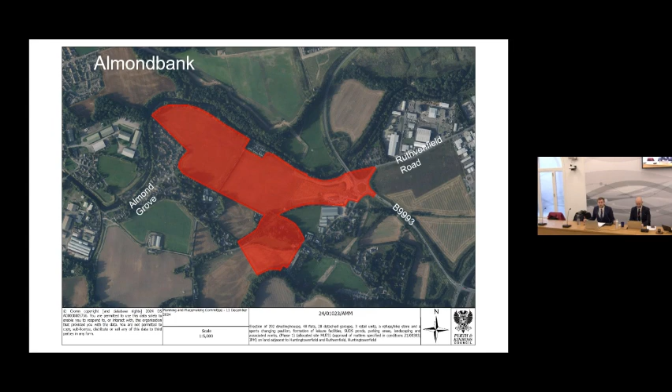This is now an extract of the Perth and Kinross Local Development Plan 2, adopted in 2019, showing the site under question. As seen, the site is allocated as part of the wider MU73 designation. Next slide, please.

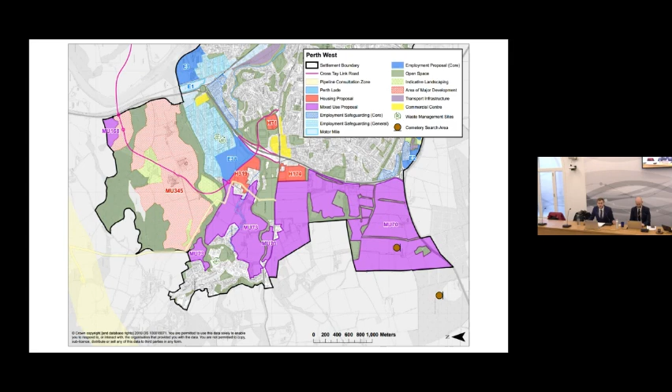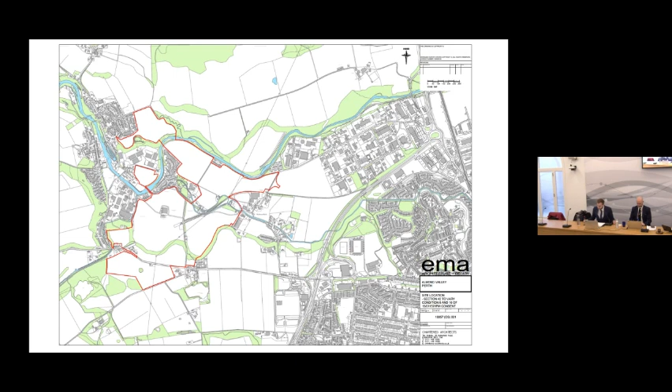This plan now shows the extent of the planning permission in principle for a mixed-use development that was granted. The application before you today constitutes only the northeasterly section of this site. Next slide, please.

This plan shows the detailing that has already been approved for this section of the site for the former Stuart Milne Group. Your attention is drawn towards the general layout and arrangement of the scheme. Next slide, please.

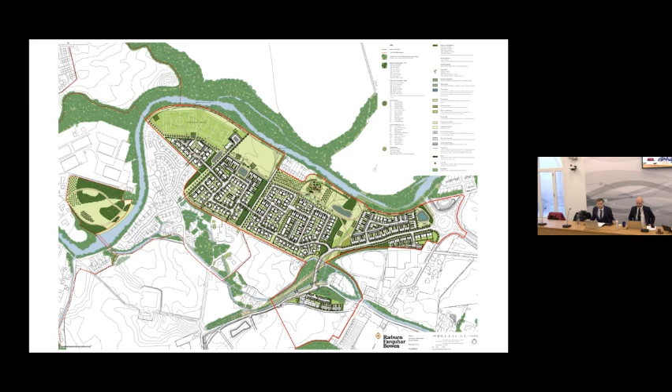This plan now shows the detailing that is currently proposed as part of this application. As can be seen, the general layout and arrangement is broadly similar to that already approved. The main changes primarily relate to the design of the buildings to reflect Barratt Homes house types and styles. The section of the plan highlighted by the yellow arrow will be shown in greater detail on the next plan. Next slide, please.

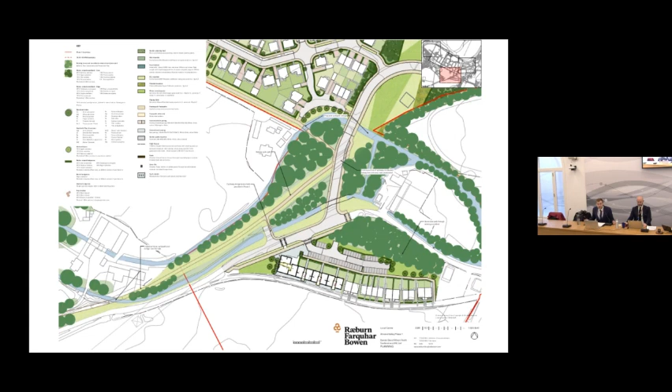And here is that section in greater detail, showing where some of the retail units will be placed to form a commercial centre, in addition to a new crossing over the Townslade to allow an additional access into the site. Next slide, please.

We now have a typical elevation drawing showing the 4-bedroom Ballater house type. Of the 340 residential units proposed, 255 will be for private sale and 85 will be affordable homes. Paragraph 5 of the reports before you detail the breakdown of these homes, showing there is a combination of 1, 2, 3 and 4-bedroomed homes.

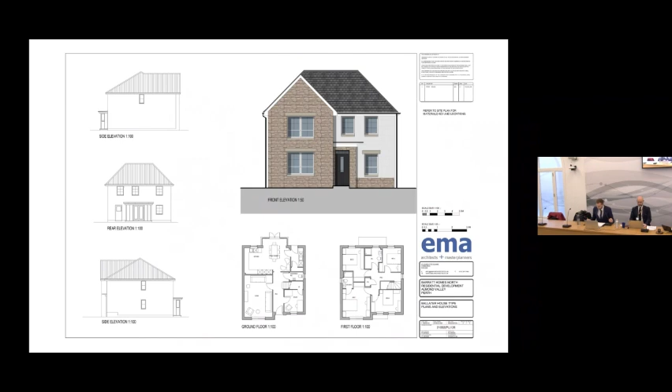Next slide, please. Thank you, convener. That now concludes my presentation. I will leave members with the proposed site plan for reference.

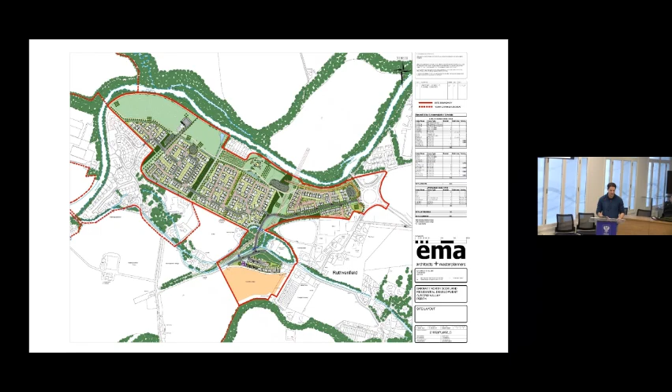Is that on? Yeah. Thank you, convener. Thank you, committee. It's great to be here. Thank you for giving me the opportunity. First off, I'd just like to say I recognise the need for housing. People need homes, and I'm not against that. However, I do have some specific objections to the development in question. However, I wish to be constructive and proactive in my criticism, and I hope that comes across in what I say. I'm amalgamating a number of my written points which I submitted, and I'm paraphrasing some stuff too due to time constraints.

I think there's potentially an opportunity being missed here. There's some fantastic examples of sustainable, community-centric, well-serviced developments being built across the UK that are winning awards for their forward thinking. This committee has the opportunity to set expectations for similar with this development. I think it would be a missed opportunity to approve another car-centric urban sprawl development, especially in light of PKC declaring a climate emergency and other factors like that.

In addition, there are multiple visions for playing fields and other sports-centric community spaces. However, what about for people who aren't involved in sports, who aren't interested in sports? It'd be great to have other spaces available for people from the community to come together. This could be allotments, community gardens, an orchard, social workshop spaces for people to learn and share skills together, a community hall. These things do appear to be missing, and these are things that would really be great to see, where people from a diverse group of backgrounds and abilities and ages can actually come together and develop as a community. I'd really like to see something along these lines, but I also like sport, don't get me wrong.

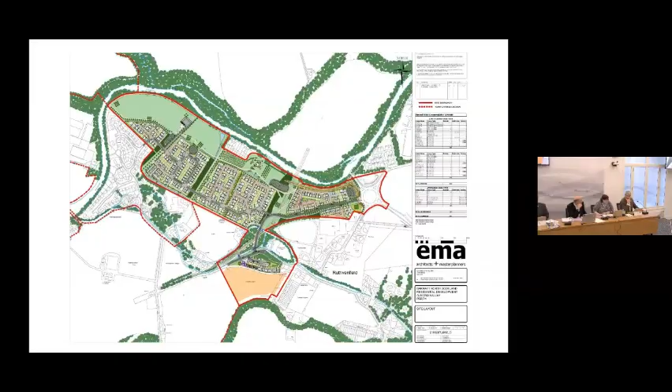Yeah, sorry for the people who've dealt with this before already. Is it possible to get the map up again? I can't see what I'm describing. No criticism of you - I just, there we go.

So basically, the 22 properties of Grey Row are serviced by a communally owned septic tank, which is under the existing football pitch. However, in the field immediately to the east of the football pitch, between Grey Row and Tarry Row, there is a runoff from the septic tank which joins Tarry Row's runoff and then disappears into Perth somewhere. That runoff runs through the field, and there are 3 access hatches to access the pipe running through that field from the football pitch towards Tarry Row. They're submerged about half a foot under the ground, and the pipe is about 4 to 5 feet below that, accessed by these 3 hatches.

If there is an issue or blockage, we have to hire a mini digger, dig up these hatches, excavate, open them, and undertake rodding and repair activities. So if something did go on this field, it would put us in a very difficult position - we need to access this, otherwise sewage comes back into our houses. So that's the point - it's not the septic tank itself, it's the runoff and drainage system attached to it, and foul water too. Okay, apologies, thank you very much for that.

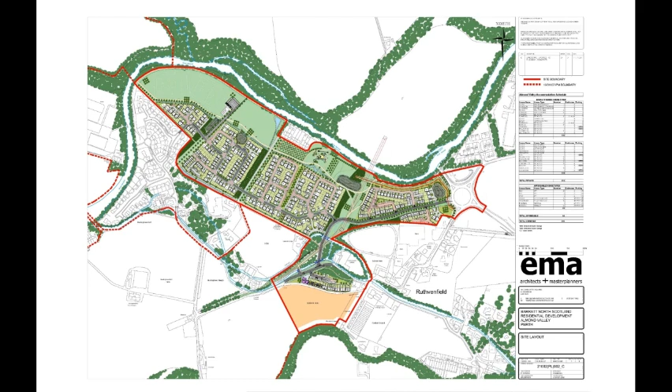Where the cursor was, the football pitch down in the centre, is that the football pitch? Yes, so you've got Grey Row, then immediately behind us are our gardens, and then there is an existing football pitch, and then there is the field beyond that. So yes, there is already a football pitch there, and they're looking to provide more football pitches and playing fields in addition within the proposed designs. But that second field is where our access hatches are. We don't have any access hatches under the existing football pitch, so they remain undisturbed if we do have issues. But that's actually outside the proposed development. Is it? Okay, well the red line is- I wasn't sure. I know there was stuff planned for future phases, so that's what I may have become confused as to what phase that was, but there are things proposed for that down the line.

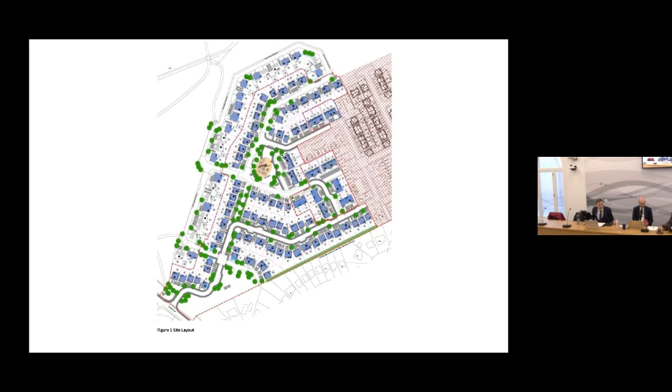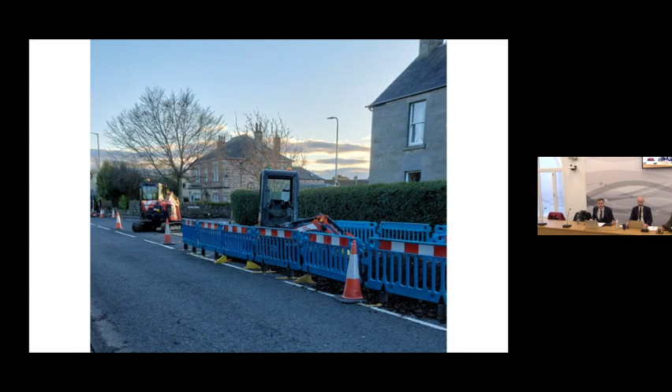Thank you, convener. That now concludes my presentation. I will leave members with the location plan for reference.

Thank you, Mr. Panton. Can I ask members if they have any questions for officers?

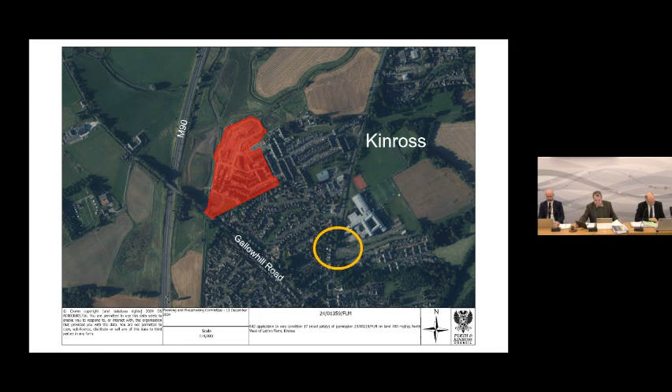Councillor Cuthbert: It's really a point of clarification, but in terms of if we refuse this application, does that mean they have to do the works immediately, or does it change something else?

So as they're already above the threshold of the original condition, if the application was refused today, then it would constitute a breach of condition. So our enforcement team would then have to look at that and whether it would be reasonable or not to serve a breach of condition notice.

But maybe to answer your question more directly, no, they wouldn't have to do it straight away. In fact, they can't do it straight away because there are already programmed works in that location that they can't get access to the road at this time. What they're looking to do is defer it until they can get access, which would be after the works that are being undertaken. And I understand that that's in March.

Thank you. No further questions?

Yes, just to advise members as well, you'll have seen there was an update circulated with an additional 2 informatives and a typo. So if you're recommending approval, it would be in line with that update that was circulated.

Okay. Right, can I ask for a motion? I see Councillor Cuthbert's already in there again. Keen to get this over with, eh?

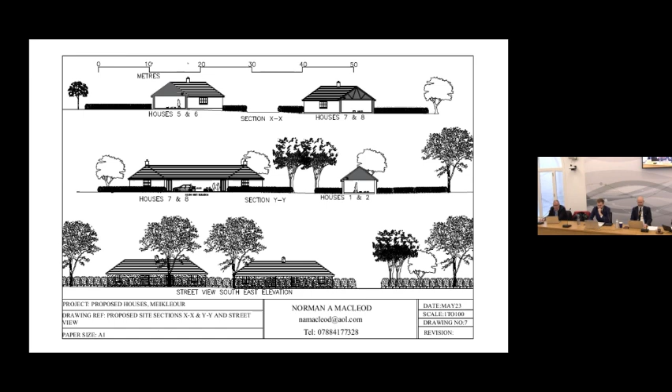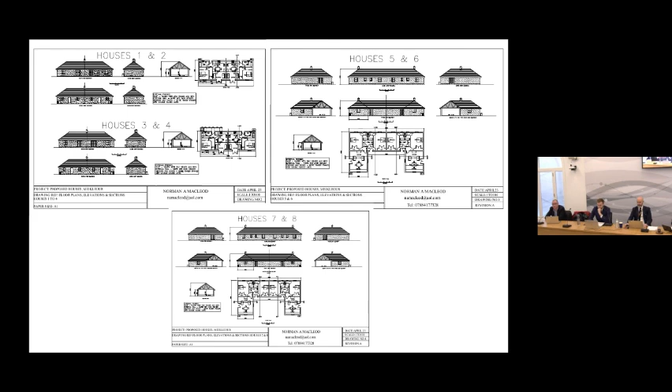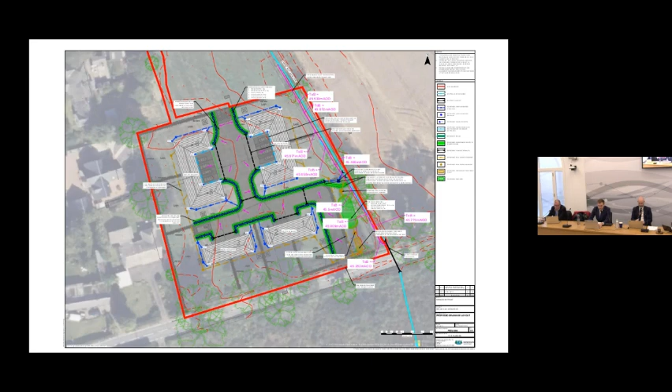Next slide, please. Thank you, convener. That now concludes my presentation, and I'll leave members with the site plan for reference.

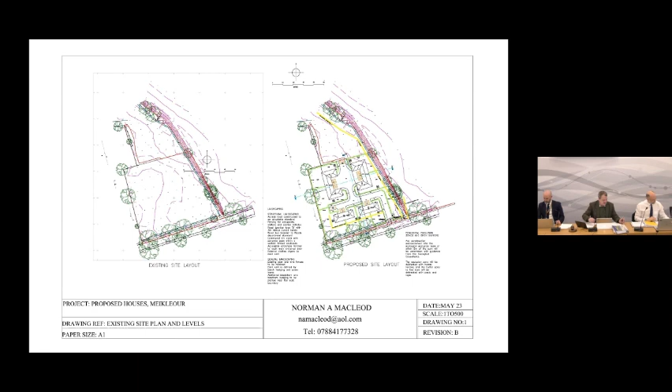Thank you, Mr. Williamson. Can I ask the members if they have any questions for officers?

Councillor Braun. Thanks, convener. I noticed that all the properties were going to have air source heat pumps on them. I know there's a condition about noise, but have you actually checked any assessment of the potential noise for these things? Bear in mind, there'll be, what, 4 of them?

Thank you for the query. Certainly from our experience, and relying upon the input of our environmental health colleagues, most of the air source heat pumps nowadays fit within the guidelines and the criteria that we set forward in the condition. So I'd be relatively confident that they would be able to adhere to that going forward.

Yeah, maybe just as an addendum, that is a point that we have debated at some length internally, and we've come to the conclusion that there's no longer a requirement, given our experience, to apply a condition in relation to that, unless there are perhaps new or different or excessive scale numbers of air source heat pumps, such that we would think that it would be beyond what the normal scenario is.

It's also worth noting that retrospective fitting of air source heat pumps and the such like is now encouraged through permitted development rights, and there is a standard applicable to that, and almost all manufactured air source heat pumps would comply, so it's unlikely that there would be an issue for this now fairly standard form of providing heating to properties.

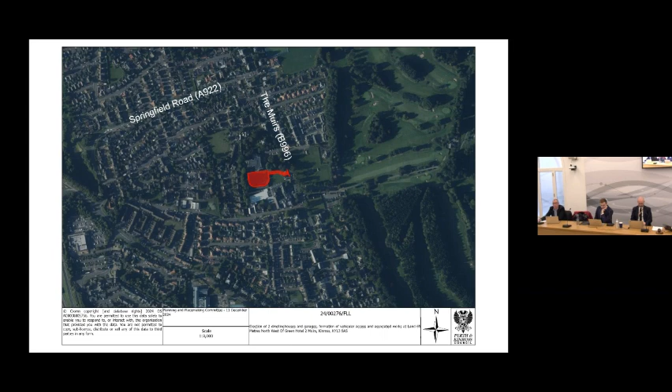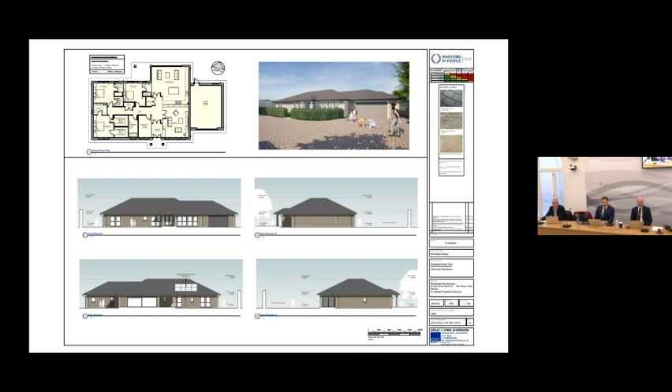Here we have the elevations of the intended dwellings on site. As members will note, they are hip roof style, comprising slate roofs, and also feature stonework, keeping the proposals relatively low scale.

Again, we have some more artist visuals from the agent showing how the development would fit in, and some further axonometric plans showing it from an elevated view.

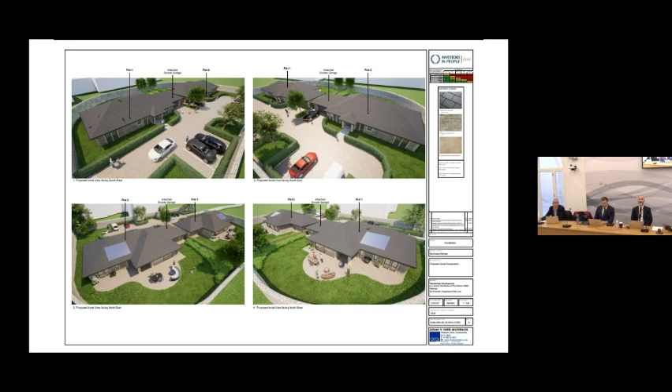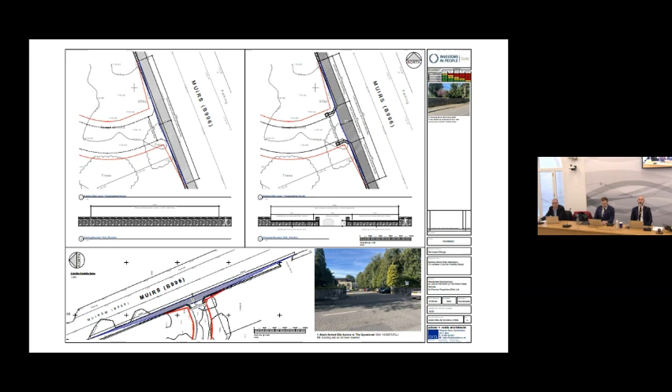This is the site access arrangements before us, showing both the provision of new gate piers leading into the site and the lowering of the existing boundary wall on either side to create the visibility splays. Here we also have the drainage layout that has been tabled.

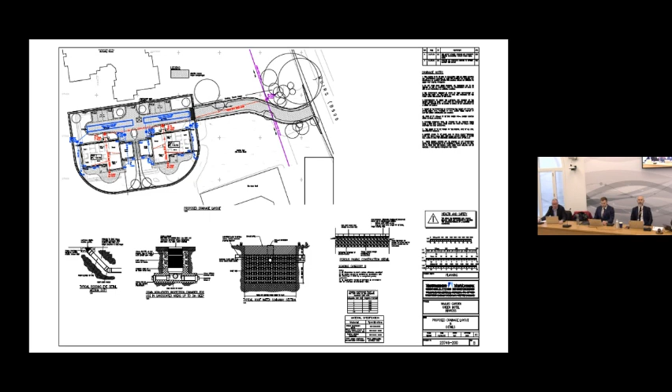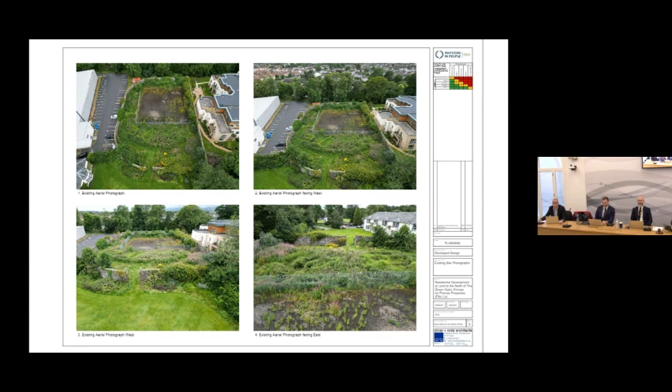I'll now run through a selection of site photos taken by the officer recently. We have some drone footage, again undertaken by the agent, showing the extent of the walled garden area sandwiched between the curling rink and the adjacent retirement home. As members will note, the tennis courts are quite overgrown, with an unkempt appearance.

Lastly, in reviewing the circulated reports, it was noted that condition 6 relating to the landscaping condition had omitted the requirement to replace landscaping which fails or dies within the first 5 years. So should members be minded to approve this application, we would be looking to update that condition to account for that scenario.

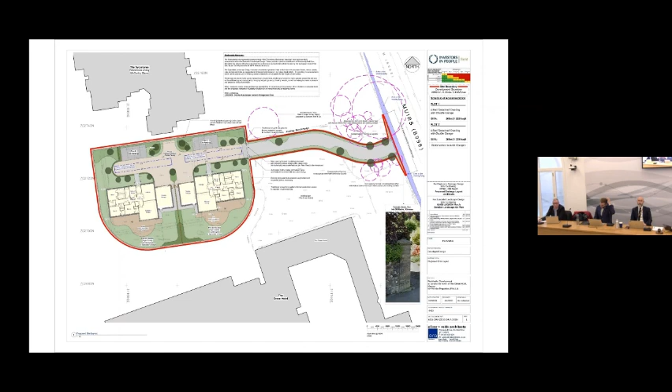Thank you, convener. That now concludes my presentation.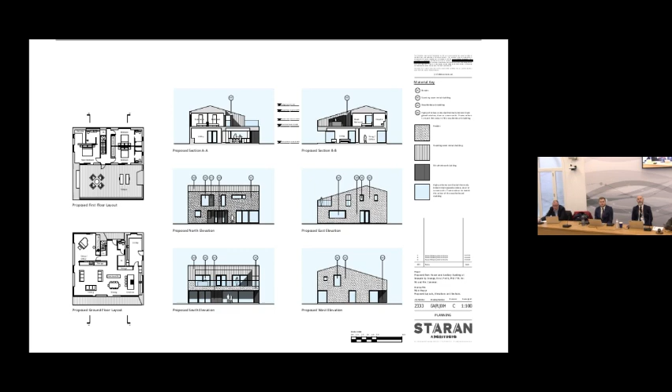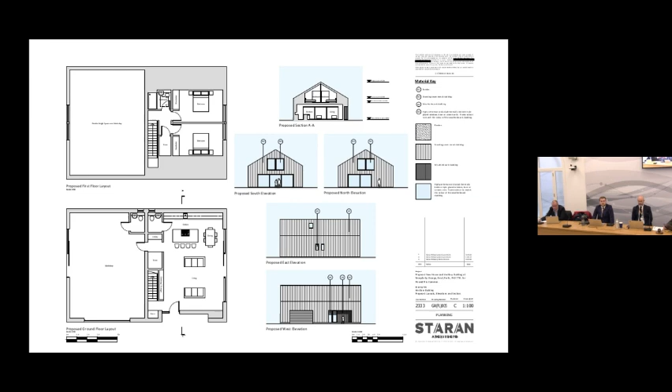This next slide shows the adjacent ancillary accommodation, which also comprises a workshop. This would have some complementary design themes, although would be largely metal clad. As outlined in the report, conditions can be utilised in respect of ensuring ancillary usage and also restrictions on potential noise impacts.

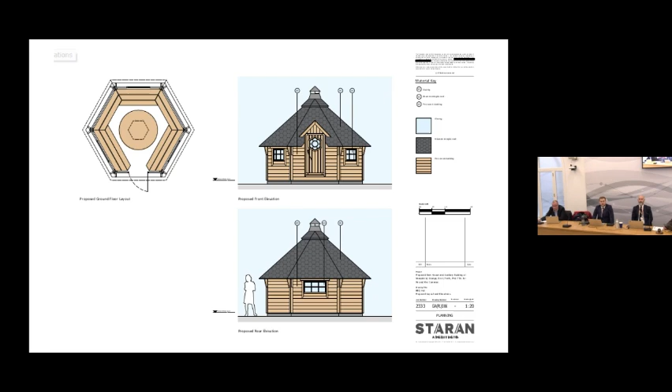Next, we see the small-scale summer house building, which had been erected on site. I will now take members through a series of site photographs taken recently by the case officer.

The first photograph shows the view southwards towards the Tay with Russigg House on the left and Seabank to the right.

These next photographs show the view eastwards towards the aforementioned Russigg House and the 2-storey Carthagena Cedars beyond, and on the right is Seabank, which itself is also of a contemporary design.

Next, we see the respective photos in either direction from closer to the Tay. Seabank is on the left-hand side this time, and Russigg House on the right.

This next image seeks to show the slightly staggered arrangement. As you look eastwards from Seabank back towards the other dwellings, it also shows the use of contemporary design materials in the most recent addition to the grouping, and also the variety in design of dwellings in this area.

We now see the small summer house building, which was erected at the southwest corner of the site, adjacent to the landscaped boundary features beyond.

These last images show the general arrangement of the access track serving the small hamlet.

Lastly, it was just to confirm that it's been flagged to us that a condition relating to details of refuse storage is required to be submitted and approved, and that an informative should also be added in respect of highlighting the potential for parts of the private access to be affected by surface water. These would have to be added in addition to those listed within the report should members support this proposal.

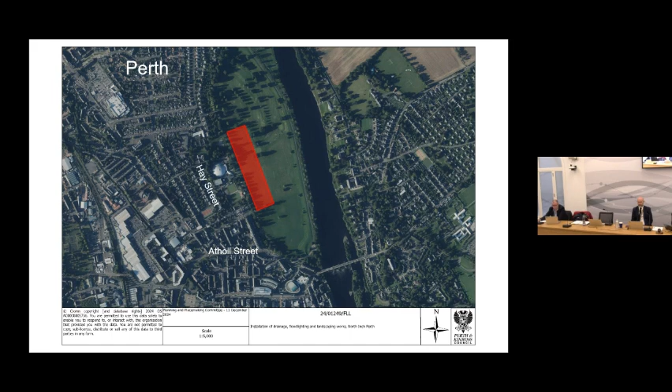Next slide, please. This first plan shows the location of the site on the western edge of the North Inch, close to the Bell Sports Centre. The red area notes the development site itself, comprising the 3 westmost pitches utilised by Perthshire Rugby Club, but free for wider usage.

Next slide, please. Here we have a proposed site plan for the development. This shows the 4 pitches in total in greater detail, with works only taking place to the 3 coloured green. This includes upgrading drainage and the erection of 6 15-metre high lighting columns, each to pitches 1 and 3 respectively.

Next slide, please. Next we have a light spill plan showing how light spill from the columns can be calculated and how it can be controlled through planning condition. I will now take members through a series of site photographs taken by the case officer last week.

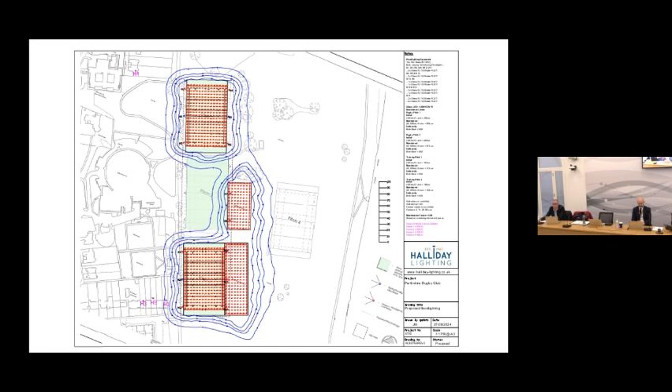These first photographs show the context of the site in relation to the edge of the North Inch and illustrate the heights of existing trees, rugby posts and lighting columns which already exist. Next slide, please. These next 2 photographs show the existing pitches, posts and columns in greater detail and how wider access across the North Inch is maintained.

Next image, please. And lastly, again with apologies, while the associated floodlighting report assessed as part of the application fully considered the height and type of lights and columns proposed, we have not had associated elevations provided. We therefore require an additional condition on top of those listed within the report to require submission of these details prior to the commencement of the development, should members be minded to approve the application. Thank you, convener, that concludes my presentation.

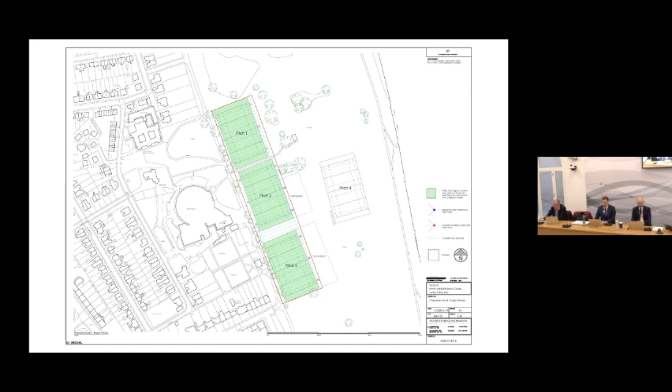Thank you, Mr. Williamson. And we have a deputation on this, so I'll now hand back to the Vice Convener for the deputations procedure.

Thank you, convener. Can I call on Mr. Bruce, agent to the application? Mr. Bruce, I believe you're not doing a deputation, but you're going to be taking questions from members if they so wish. Is that correct? Right, yeah.

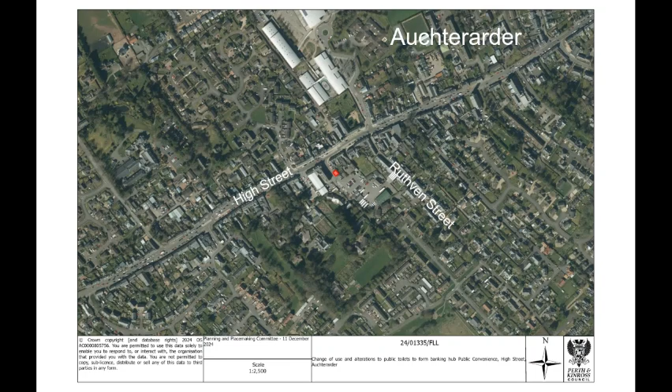This first plan shows the location of the site near the centre of the settlement, just off the High Street in Crown Wynd.

Here we have a proposed site plan which shows the positioning of this small building near to the car park frontage.

Next, we see a slightly enhanced aerial image showing the relationship of the site to the wider centre of Auchterarder. In addition to the nearby commercial property, there are also a number of residential properties in close proximity too.

Next, we have the respective elevations for the various faces of this box type structure. External alterations would be relatively minor, and a separate application for advertisement consent would be required.

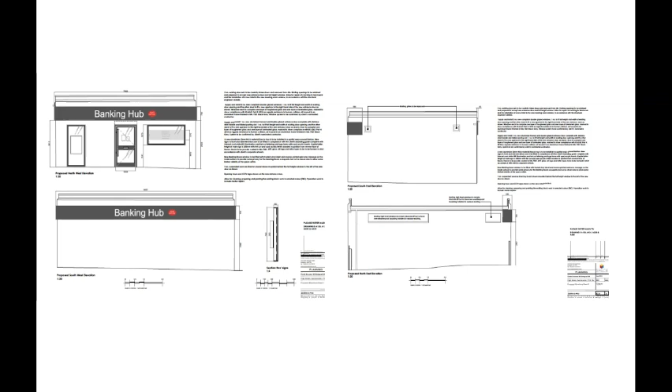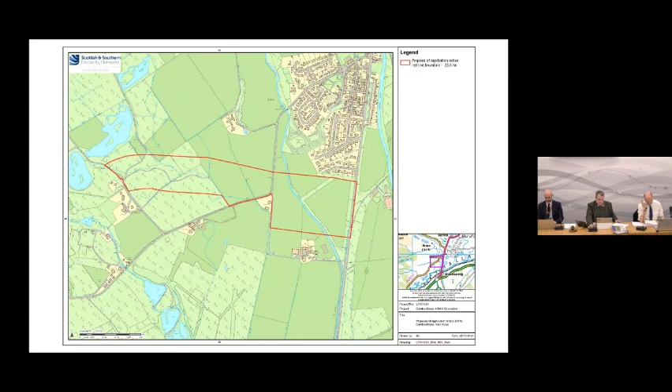We'll go to the second PAN, which is the formation of access tracks, bridge, compound and associated works at land 360 metres north of Glassick Farm, Braco, Dunblane. Any comments on the report? No comments on that report.

Councillor James: again, convener, I kind of find it a little ironic that we're taking a lot of green space to form green energy, and have concerns of destruction of some woodland on this one. Do we already have an application for a battery storage wind farm or whatever it is on this site?

I can cover that for you, Councillor James. By way of background, this is associated with the SSE proposal to upgrade Braco substation, which is a national development. The reason this road is required is because the transformers, given their size, wouldn't fit round the bends currently in Braco. So they're looking to do essentially a small bypass to the south of Braco so they can get the equipment up to the substation. Hopefully that clarifies. It does. Thank you very much indeed for that.

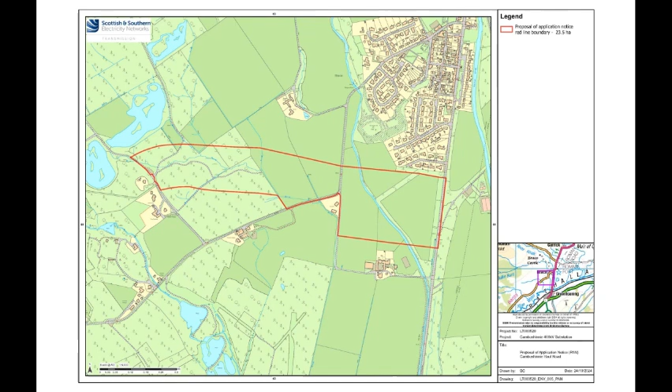Any further comment? There's no other business today, so I'd just like to extend my thanks to everyone who attended today and took the time to come and do deputations. I know none of them are here now. I'd also like to extend my thanks to the committee members for their service in 2024, and also to Jess for her help with this committee over the last 2.5 years, and wish everybody a Merry Christmas. Thank you.